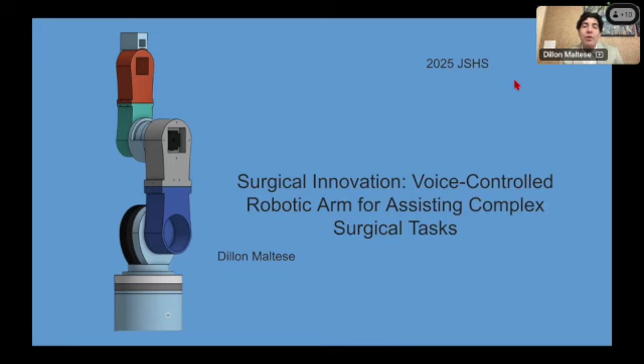In the US, over 250,000 people die from medical errors each year, and of this, over 4,000 people die from surgical errors yearly. What labs like mine have done are implement augmented reality into the operating room in order to try and combat this issue.

This is great as it allows the surgeon to see the patient's anatomy in real time, but it does come with problems. The main is that the surgeon needs to operate an ultrasound probe on the patient at all times in order for the headset to actually update.

So this is obviously a problem as the surgeon only has two hands and he needs both of them to operate. So what I have set out to do is create a voice-controlled robotic arm in order to act as the surgeon's third arm and assist him with this task.

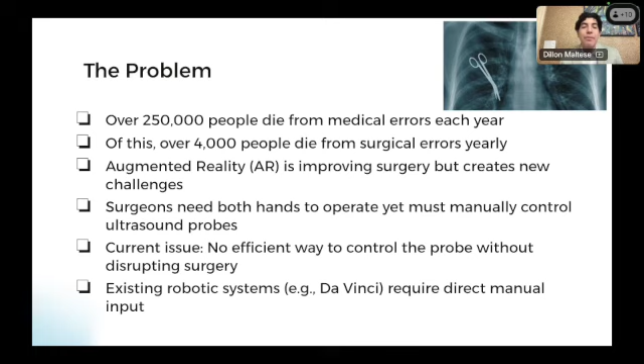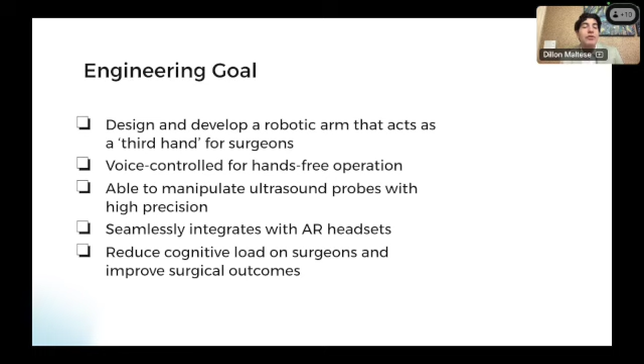So my engineering goal for this project was to actually develop and create this third arm and then to make it voice controlled because this will allow for it to actually be a surgeon's third arm. And it should also be able to manipulate ultrasound probes properly, which will in turn allow for augmented reality to be able to be implemented into the operating room and reduce the stress on a surgeon.

This led into me proposing it to my lab and the head of my lab. And he was very skeptical at first. He didn't really think I could do this, but he said, you know what, we'll give you the time and space to do it. And if this really does develop, then we'll start giving you more and more supplies in order to make this into a product.

This is when I started 3D modeling and chose hard plastic as my material for this project. The main reason was because I was fortunate enough through Weill Cornell to have access to a 3D printer, which allowed for quick iteration. And on top of this, hard plastic is very lightweight and sturdy, which is great for something in the operating room.

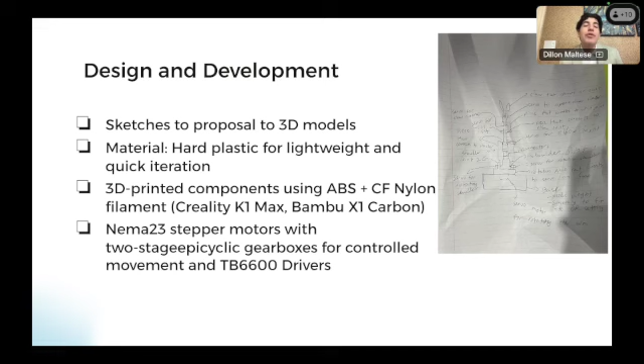This is when I also chose to use NEMA 23 stepper motors with two-stage epicyclic gearboxes. And now to kind of go more into what a gearbox is, it's this attachment to a motor that allows for this thing called a reduction ratio. And what I mean by a reduction ratio is decreased speed, but increased torque. So more weight can be pulled by the motor.

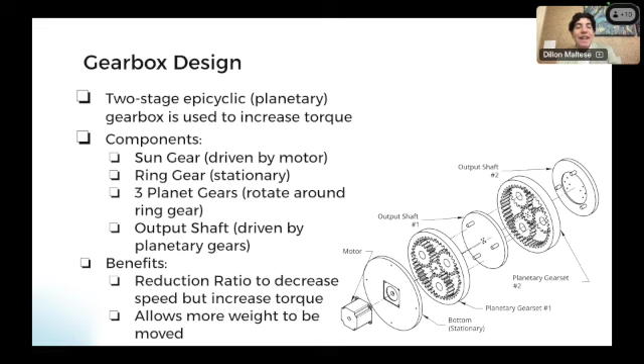This is great for something like an arm in the operating room because you need it to be able to pull more weight than necessary in order to make sure it doesn't break down in the operating room, which would be pretty bad. And now to go into a little more on how this works.

So you start with the motor down here, which then connects to this sun gear, which is this gear right in the middle. When the motor spins, the gear spins, and it spins the three planetary gears on the outside around this stationary ring gear. These three planetary gears are rotating at the decreased speed from the reduction ratio and are connected to the output shaft. The output shaft then screws into the second sun gear, which becomes the input for the second gear set, and the second output shaft is the final output.

The reason I chose to use two stages for this is mainly because the reduction ratios are multiplied. So what I mean by that is if the first gear set has a 5-to-1 reduction ratio and the second gear set also has a 5-to-1 reduction ratio, the total reduction ratio is 25-to-1, which is pretty big.

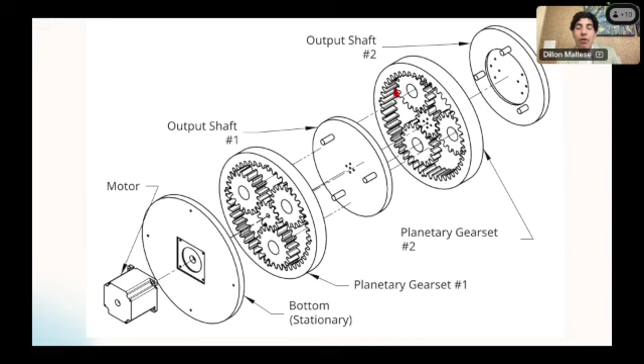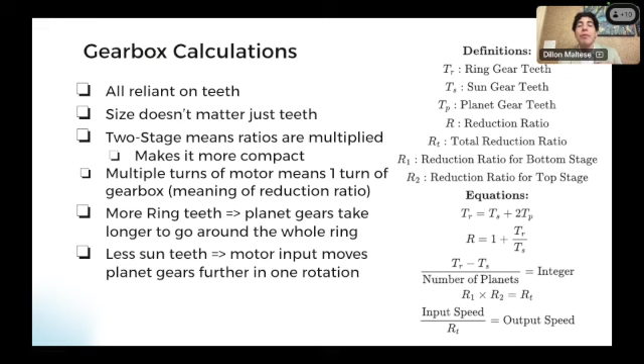So now going more into the calculations, the main thing I want to emphasize here is the fact that the teeth are what matter. So what I mean by this is these ridges right here on the gears are the teeth, and the amount of teeth on each piece is what determines the reduction ratio because that's what determines how fast the planetary gears actually rotate around the whole ring gear, which is why the size doesn't actually matter. It's mainly the teeth.

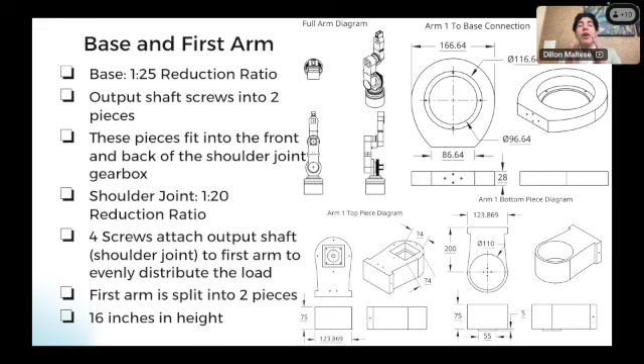And you can kind of see right here that the shoulder gearbox is right in the middle. It's this white piece in between. And the shoulder gearbox's motor is right over here on the right, sticking out of the back. And the way I connect the shoulder gearbox to the first arm is by using these four screws that screw through the first piece of the arm into the shoulder's gearbox.

And if you look closely here, you can also see the first part of the arm is actually split into two pieces. And the reason for that is because the 3D printer I had access to was 10 inches by 10 inches by 10 inches. And the whole first piece of the arm is 16 inches long, meaning that it wasn't possible for me to print it all in one print.

So what I did was I printed these small little squares that screw into both sides of the first piece of the arm in order to connect them together and make sure that I could get this 16-inch long arm without needing to use a different 3D printer or use a different workaround.

And to now go into the second arm, it's very similar to the first arm. It uses a 1:15 reduction ratio, again, climbing up as you go further up the arm. And it's seen right here. That's the gearbox. So there's a NEMA 23 stepper motor inside the top of the first arm that becomes the input for the gearbox. And then it screws in just like with the first arm right here to the second arm.

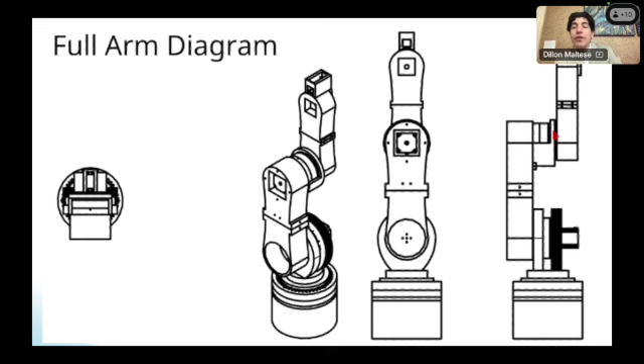And this piece right here is kind of like the shoulder to base connector, except it connects the furthest point of the second gearbox to the first arm and then allows it to rotate. And again, this piece is actually 13 inches long, which again is too big for the 3D printer I had access to, which is why I split it into two, just like with the piece before.

So now going into the wrist and claw joint. So the way the wrist works is it connects to a NEMA 17 stepper motor, which is seen right here on the second piece of the arm. And the output shaft from the NEMA 17 stepper motor fits right into this circular hole on the wrist here.

And the way it works is that when the NEMA 17 stepper motor rotates, the wrist rotates with it, in turn being able to move where the claw is facing. And so, as you can see, I kind of made this odd looking semicircle shape on the top of the wrist.

And the reason for that is because if you look at the second piece of the arm, it's also curved. And so what this semicircle hole allows me to do is it allows the whole wrist to rotate a full 90 degrees in each direction without ever coming in contact with the second piece of the arm.

And this is crucial because you can't have two things coming in contact with each other frequently, as they'll eventually deteriorate and lessen the lifespan of this arm, which is not what we want. We want it in pristine condition because it's performing surgery. It needs to be very accurate.

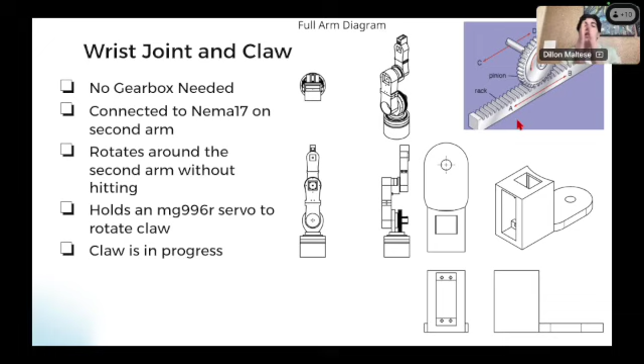Also, as you can see at the top of the wrist, there's this hole here, and that's to hold an MG996R servo, which is used to rotate the direction of the claw. And so currently the claw is in progress and it's in the works. What I'm doing is I'm 3D modeling this piece up here called a rack and pinion, which will allow the claw to actually open and close and clamp onto an ultrasound probe properly and hold it properly.

And this was crucial in the earlier stages of prototyping and designing this arm, as it allowed me to figure out how big I really needed each piece to be in order to work with all patients. Because again, this arm is used in the operating room. It needs to be adaptable and it needs to be used for different types of patients, different patient sizes, whatever is required.

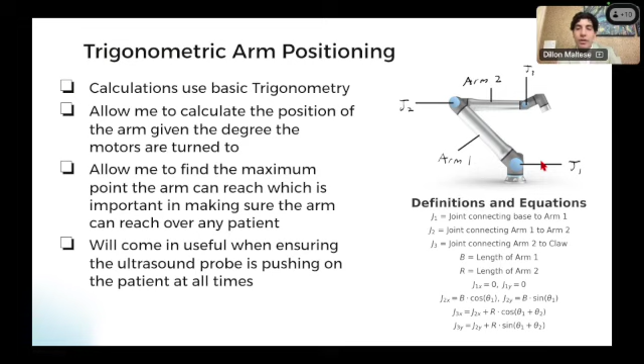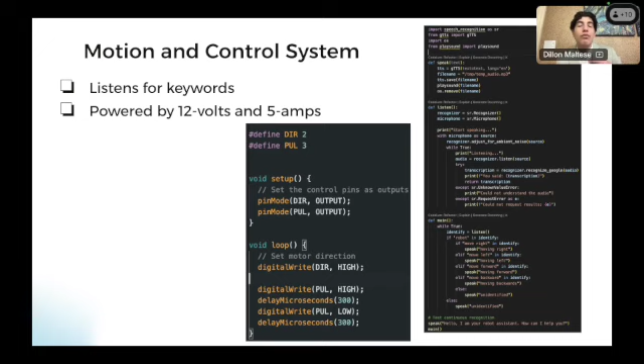And now going into the voice control aspect, right here you can see some Python code that I used. And this is how I used the voice commands on the actual robot. And so I was able to say, robot, do this, and it looked for that keyword and executed that. So now going into the testing and results, tests have started to be conducted on joint movement accuracy and speed, and the arm is moving very smoothly without vibrations, and the voice control system is successfully interpreting.

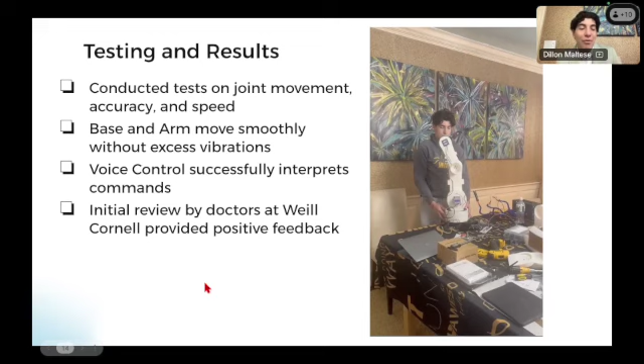So now I just want to play a little video. And so here I say robot move, and as you can see, it moves properly. This was actually taken in my dining room and was the first time I tested it, so I was very happy it worked. And so now going into the final future work and conclusions.

So the future work again is to finish designing that claw, and then I'm taking this to the SAIL lab, which is my neighboring lab at Weill Cornell, and it uses these surgical environments to mimic a surgery, and this is where I'll be testing all of these different pieces and making sure everything works.

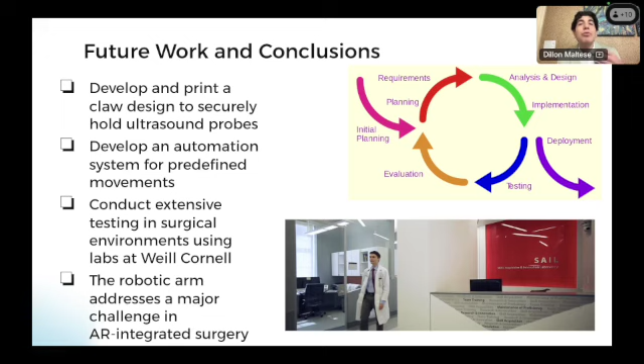And to kind of put into the grand scheme of things is my final piece. This robot, again, will allow augmented reality to be seamlessly integrated into the operating room, which will allow a surgeon to be able to use augmented reality and hopefully reduce those staggering numbers from the start.

And with that, I open it up to questions. That's time.